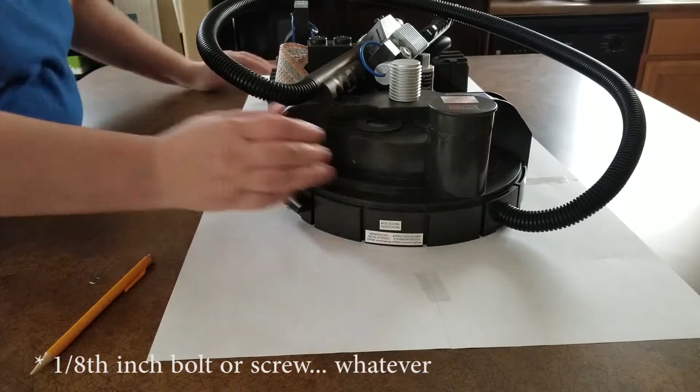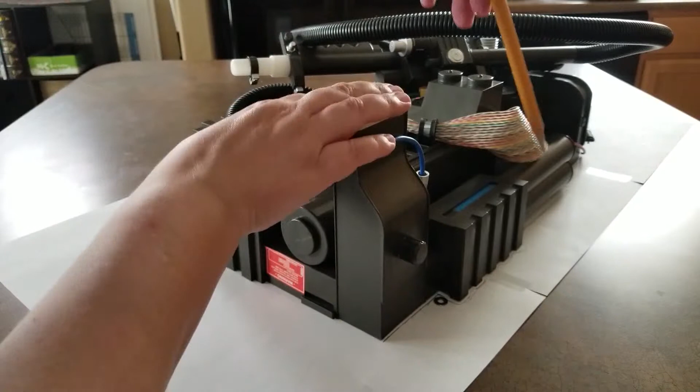Place your Proton Pack down in the middle of the page. Now what you're going to do is take that washer and butt it up against the pack, and then take your pencil and trace around the shell. It takes a little time to get used to, but just take your time. There's no rush. You definitely want to push down on the shell of the pack while you're tracing so that washer doesn't get caught underneath. There are some high points on the unit.

And again, just take your time.

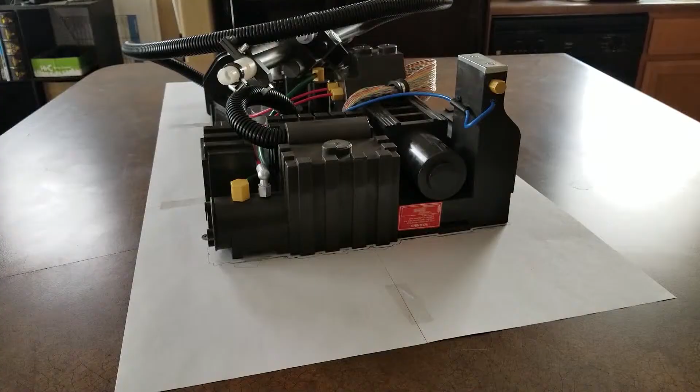So once you're done tracing the pack, remove the pack, find a straight edge ruler and a marker that you prefer. I like this particular marker. Links are going to be down in the description below. It's really great for tracing. Again, take your time, go around all your edges, make sure that they're nice and dark.

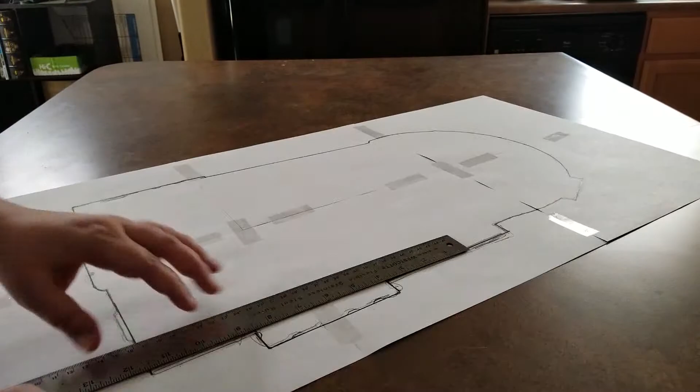Next, you want to go around to every single sheet of paper and mark 1 inch. This will help calibrate the photo in Fusion 360. I'm done with my tracing. What do you do next?

Okay, so there's a couple things you can do. You can break down the individual sheets and try scanning them, but sometimes the computer takes out the majority of the white paper, and then you're gonna be cutting and pasting. It's a pain. You could, in theory, try uploading them into Fusion 360 and piecing them together that way, but I have never, ever found that to work very well. The last time I did something like this for a friend for his full-size Proton Pack, I ended up uploading it into a wide format scanner.

Kinko's has those, so if you want to go that route, you totally can. Or, and I'm just gonna throw this out there, you can actually turn up the settings of your camera phone. Most phones have amazing high def photo capabilities. Kick it up to 11, put those settings all the way to the tippy top, get a really good downward view of your tracing, and take a photo. Save it as a JPEG if you can, PNG, whatever, and then put it into your computer. Easy peasy. Let's try it.

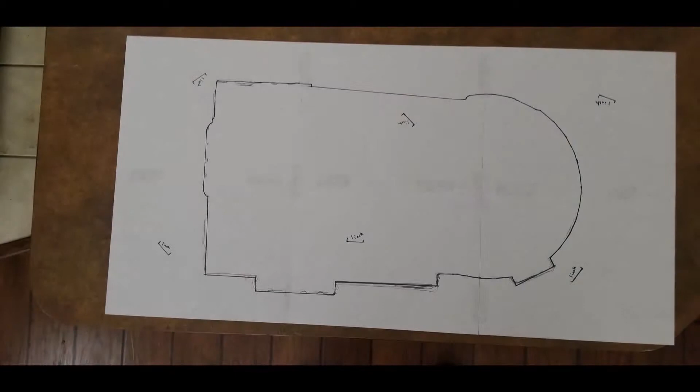Alright, hopefully that worked. So I took a photo of my tracing, and now I'm in Fusion 360. This is kind of what it looks like. These are other projects that I've been working on, but we're going to do a new project.

So we're going to click New Project. And we're going to call it Motherboard YouTube, because that's how you do.

I'm gonna click on that bad boy. So right now there's nothing here. All right, so this is a new thing.

Before you get started, you need to figure out what measurements you're going to be working with. Are you going to work with millimeters, or are you going to work with inches? I'm from the US, and though this isn't typically what I like to do, for this demonstration I'm just going to click on document settings, go to units, click the little page icon. This window pops up, and to the right you select inch and hit OK.

So here's the thing. I took a photo of the motherboard, and now I'm going to import said photo. I'm going to go to insert, attach canvas, and we're going to choose a plane. Well, let's just get the photo first. Select image... oh, my Friday video, and here we go.

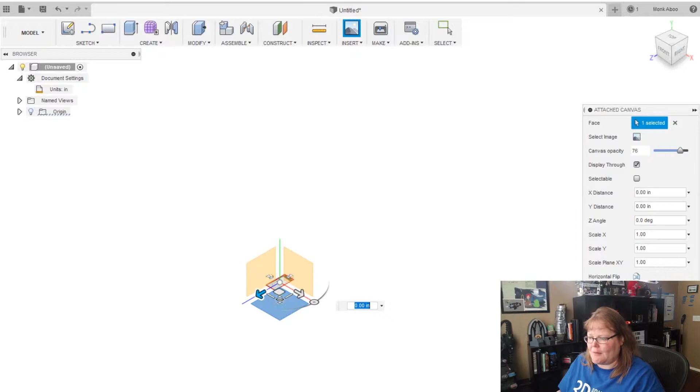What you want to do is grab it and pull it out until you feel comfy with that angle. My computer just kicked on because I'm using the video card. I'm going to drag it around and rotate this so at least it's horizontal, rotating a little bit until I feel comfy with that.

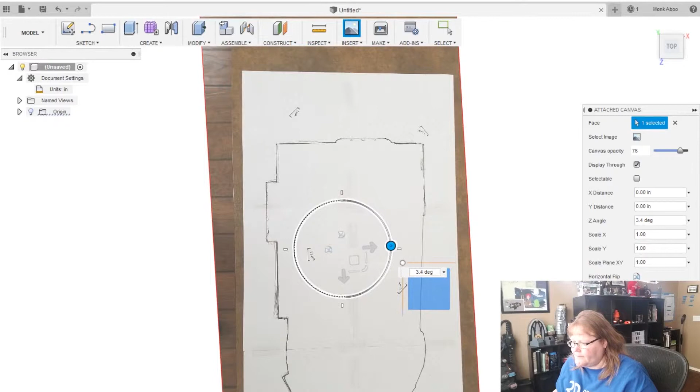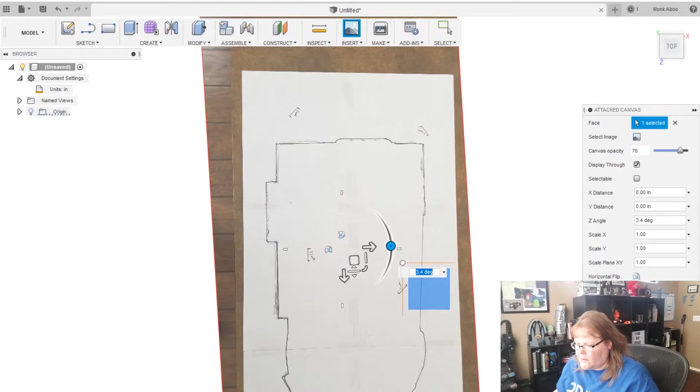I'm good with that, I'm actually pretty good with that. Okay, once you have it on a plane you feel comfy with, you hit OK, and boom, now you have a photo.

What do you do with the photo? You want to go up to sketch, go to line, or just hit the L button on your keyboard, and you're gonna zoom in. Well, actually no...

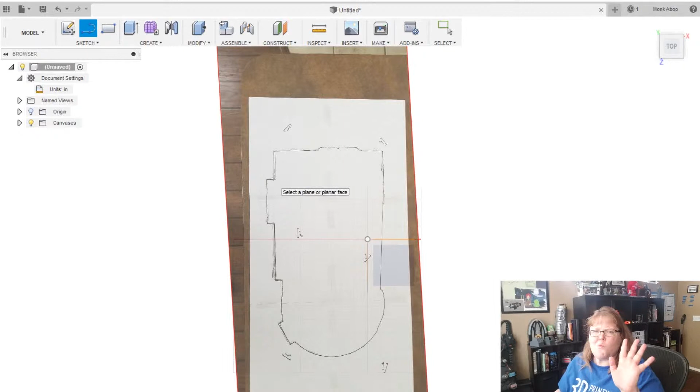Whoa, calm down, we've gone too far. Hold on, let's back up. So hit escape to get you out of all that fun stuff.

What we need to do now is calibrate this photo. To do that, you click this little triangle, right click, which highlights the photo you just imported. Now you open up the canvas, we need to calibrate it, so you right click on the photo and hit calibrate.

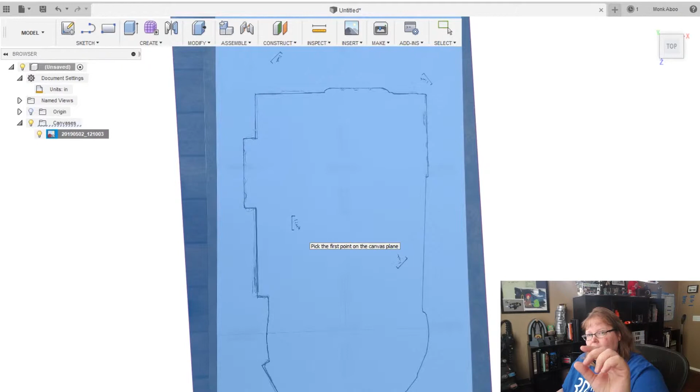And now, remember the little inch things that I did here? Well, there we go, this is why I did what I did. Now you click here, and you click here, boop, and I just say nope, that's 1 inch.

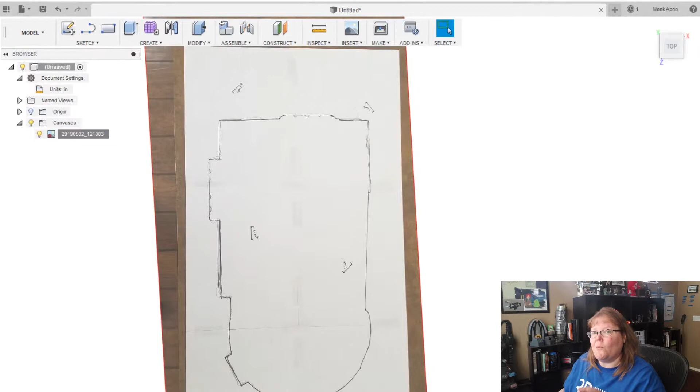When I do that, the system goes, okay, if that's 1 inch, then this is what the entire thing is supposed to look like. Pull back out, and now it's calibrated, so when I start putting down lines, it's going to be what it's supposed to be in real life.

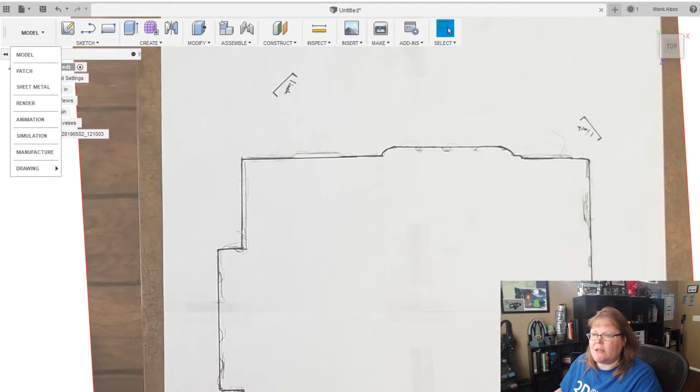Make sense? Yeah, okay. All right, so like I said, we have to basically now trace our tracing. What you can do is go up to sketch, make sure you're in the model side of things. Fusion, you have multiple options.

Ooh, we even have more options since the last time I've been playing with you. Maybe a future video. But until then, we're gonna focus on model.

And we're gonna go into the sketch area, and we hit line, and now we just proceed to trace. So, go up here, and I'm just gonna trace. There we go.

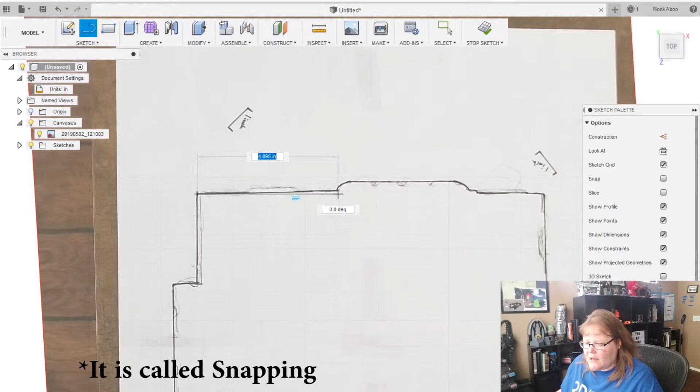Now, here's the cool thing, notice how it just kind of clicks. Say, because that line is not exactly perfect, what we're gonna do is hold down the control key, and the clicking stops so you can control it a little better.

Cool, we got 1 line down. More to go.

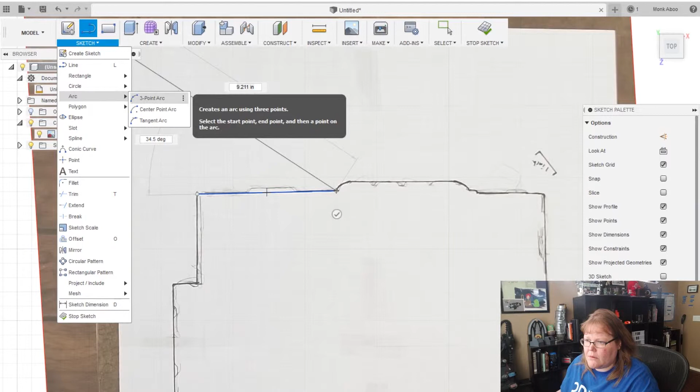Arc, we're gonna do arc. We're gonna do this, and we do this, and then see how we have this little line thing. It helps with that. Go back to L for line. Boop, all the way to about there.

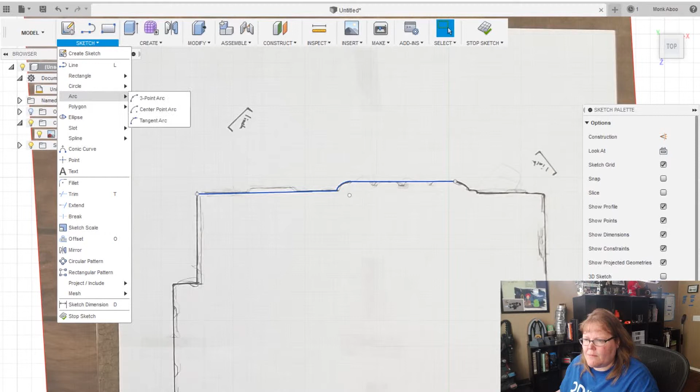Oh my god, did they change something without my authorization? Pin it to toolbar. All right, cool, let's do that.

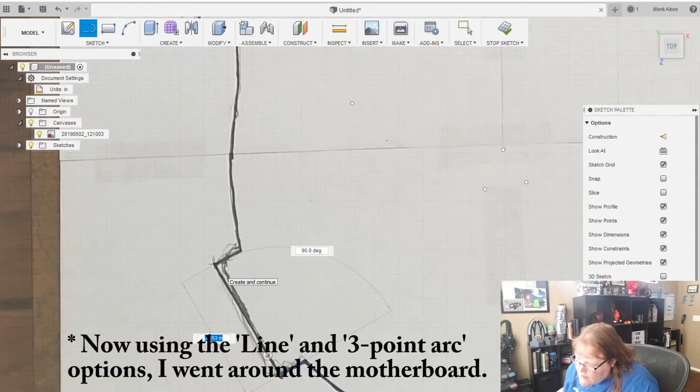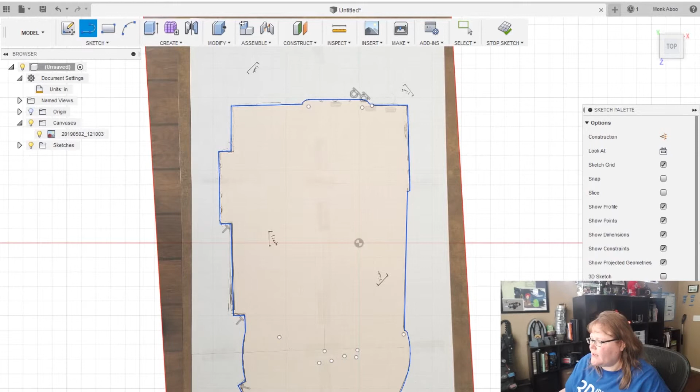And once you complete the circuit, the system goes, hey, we got a form. All right, so now we hit stop sketch. Now, what is the thickness of this motherboard?

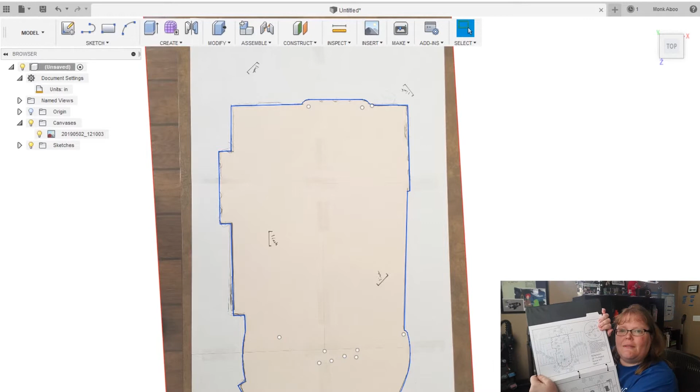Well, in the Ghostbuster community, and yes, there is a Ghostbuster community, if you go to gbfans.com, link down below, they have reference materials for the proton packs. I happen to have some plans, I like to have the plans there for reference. And in the reference, it states the motherboard should be made out of 3.2 millimeter, or 0.125 inch, aluminum to provide that thickness. This is going to be the simplest part of this whole thing.

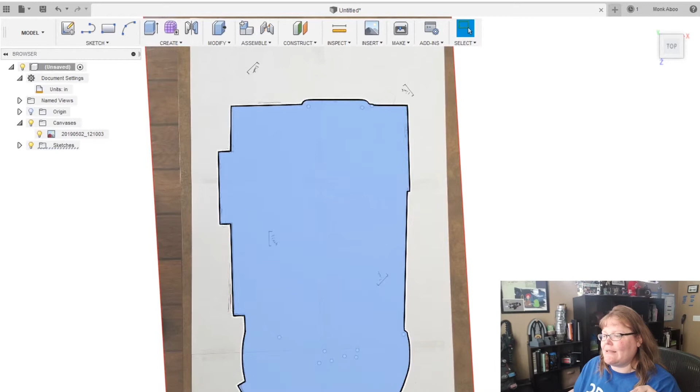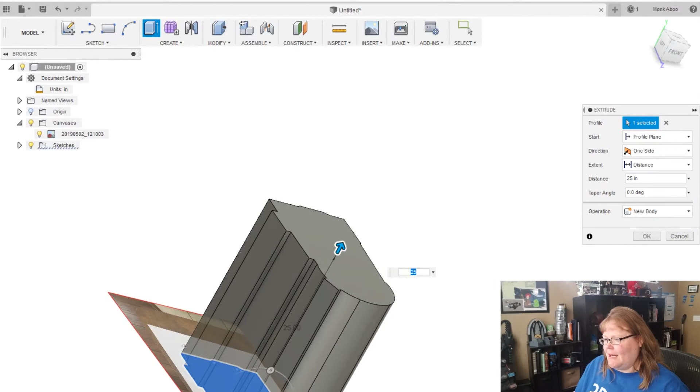You ready? What you do is you click it, right click, and say extrude. Now I'm going to rotate this so we can see what's going on. And we're going to go, the thickness is 0.125. Oh, hey, whoa. Whoa, whoa, Nelly. No. So we hit Control Z.

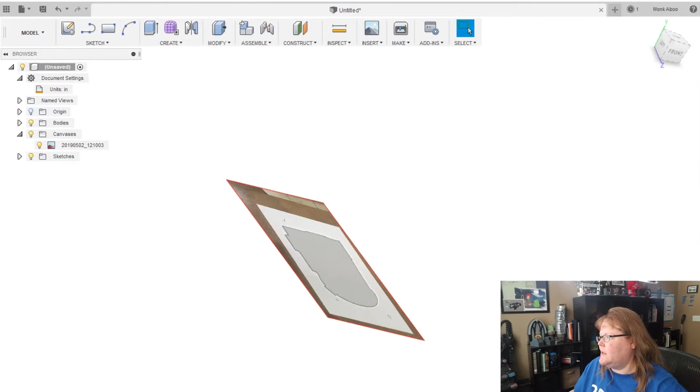All right, let's try that again, but this time with feeling. We're going to input 0.125, and since this is already in inches, all I have to do is hit enter. Bing, bada, boom, people. That is my motherboard. I can zoom around and take all the looks and whatnot. And yeah, that's my motherboard.

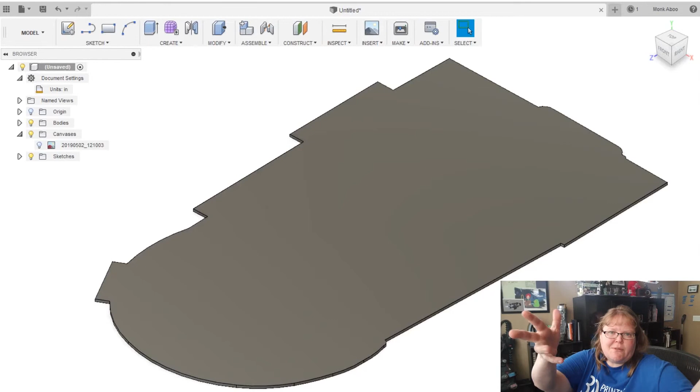And it's all from a photo that I took of a tracing that I took. And it took all of maybe 15, 20 minutes. I mean, mind you, I had to do all of the AV side of things. But it's a really quick thing.

Now that you have your model, what do you need to do? Working with my local water jet company, what they need from me is a DXF file. I need to export that to my desktop so I can put it in an email to my local water jet company and say, give me a quote. I give them the money, and a week later they give me the product, and then when I get that product, I'll come back and show you what I'm going to do with the things when they get here. That's going to be a whole other video.

But I just wanted to show you some basics. I hope you learned something about Fusion 360. It's a free program. I strongly recommend you learn it if you're debating, hey, do I do SketchUp or do I do Fusion 360? Either one, there's good things and bad things, there's some limitations here and there. You can go pro if you want to, but honestly, just play with the free stuff until you feel comfortable. And if you get really good at it, then you can go pro. But until then, just get your hands dirty, just float around it until your fingers get all pruny.

And here's the thing. It's to the specs of... oh my god, my neighbor, I'm going to kill him. I'm almost done with this video.